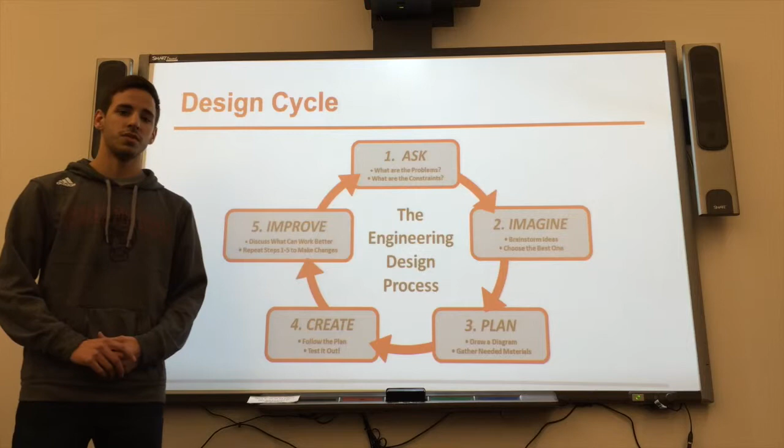During the design project, you need to remember the design cycle. Step 1 is ask, where we find out the problem. Step 2 is imagine, where we brainstorm solutions. Step 3 is plan, in which you design one of your solutions. Step 4 is create, where you build one of your designs. And step 5 is improve, which is where you improve on the design that

you built. So of course, we repeated the design cycle over and over again for the flaws in our design. But to start, here's what we came up with. First, we asked the big questions. What is the objective? Launch something precisely at a target. Then we discussed the parameters, restrictions, and requirements of our design.

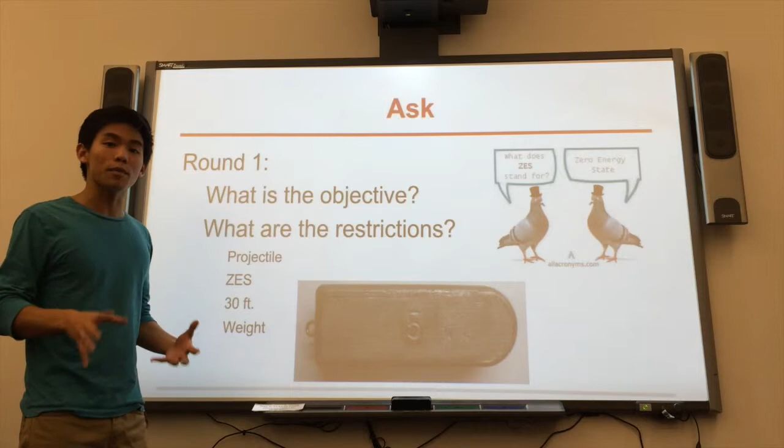The entire thing had to be able to fit in a 4-foot by 4-foot cube, and the projectile had to be safe to launch. The entire thing had to be in a zero energy state, and we had to launch the projectile 30 feet. It all had to be powered by the single drop of a 5-pound weight.

So for our research component, we first decided to look up some medieval siege weaponry, such as the ballista or the trebuchet. We decided that the design that best fit the requirements for the assignment was the spring-powered plunger and

barrel. This design involved 2 transfers of energy, the first one being the weight pulling back the spring to cause spring potential energy, and the second transfer of energy being the release of the tension that holds the spring in place, transferring that potential energy into kinetic energy.

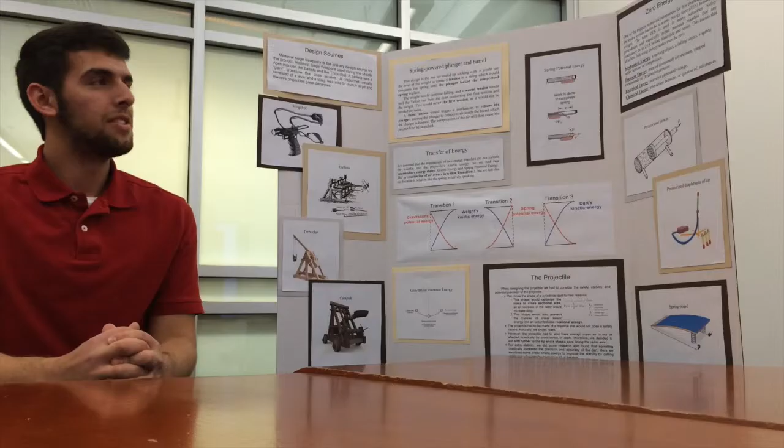The design had to start from a zero energy state. This means that there was no potential energy aside from the gravitational potential energy of the 5-pound weight.

For our projectile, we chose the Nerf dart for the following reasons. First, it satisfies the assignment's requirements that it be safe, and it is also the proper dimensions. Also, the shape of this dart is cylindrical, and it thus reduces drag, making it the most aerodynamic projectile.

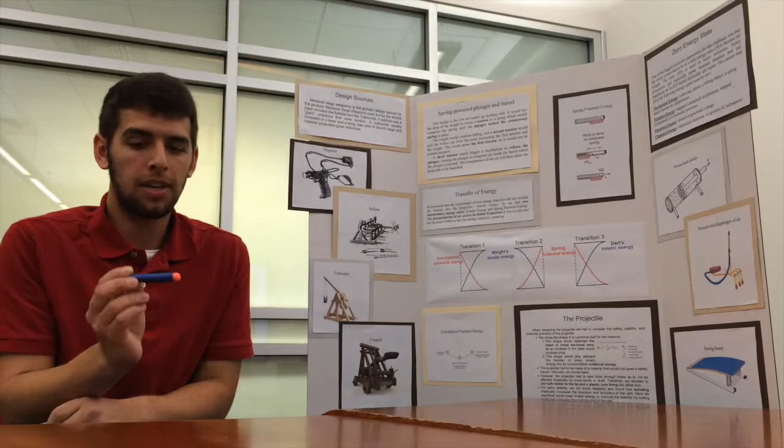On the spring-powered plunger design, we started drafting. We went through a couple of monstrous sketches, I have to admit, until we agreed on this general idea. Then we did more detailed sketches of the different components of the entire system. Here's a diagram of the cross-sectional supports of the plunger system.

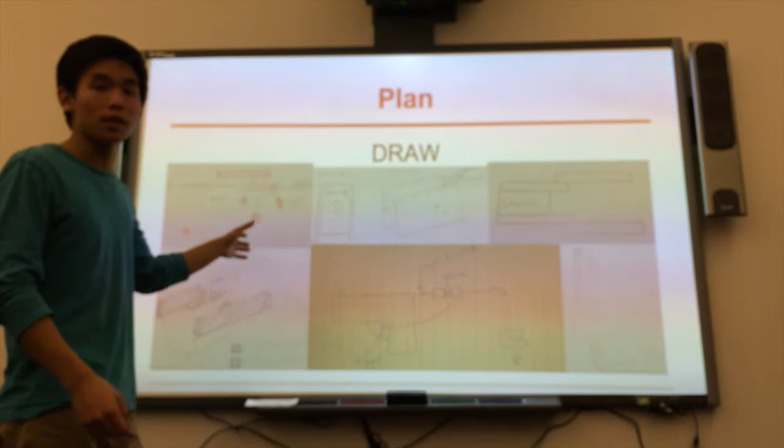Here is a profile and a side view of our chassis. Here is the mechanism for the vertical aiming component. And here's the base and reinforcing triangular supports. And here's a diagram of the pulley tower.

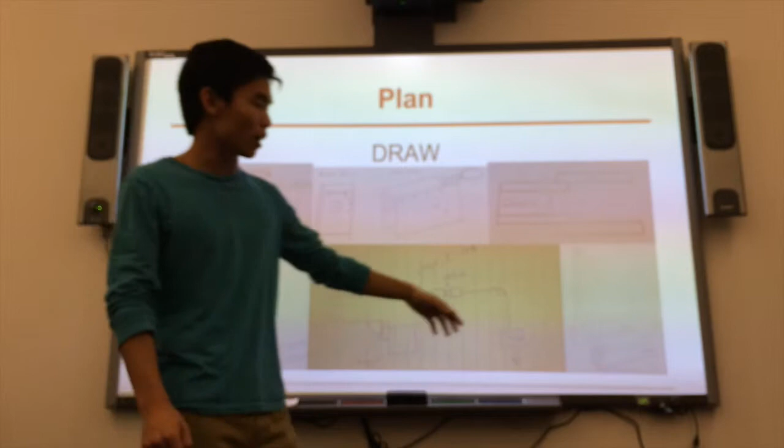Needless to say, all of our material was purchased well under the budget of $40, as most of the wood came directly from the discard bin. After fiddling with the pulley systems, we decided this version was the best and was the strongest and sturdiest construction. And of course, we tested it a lot.

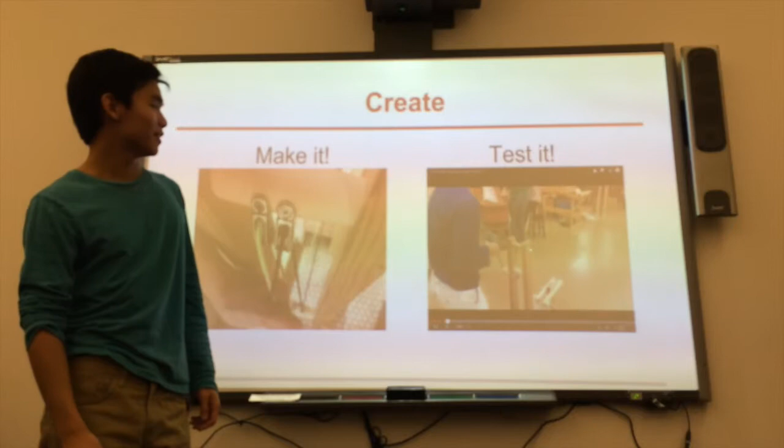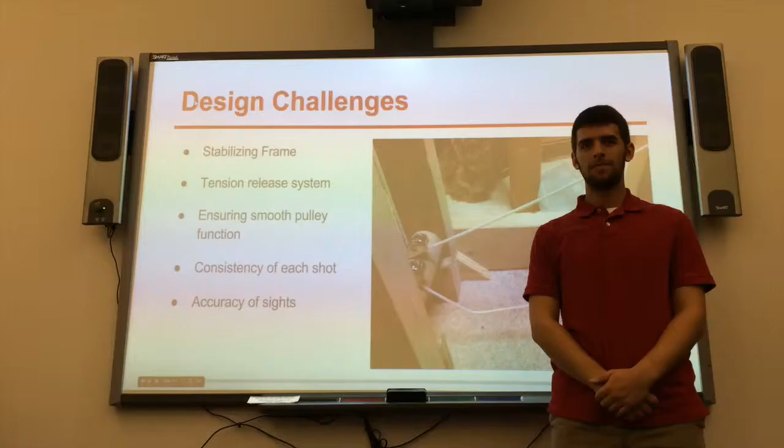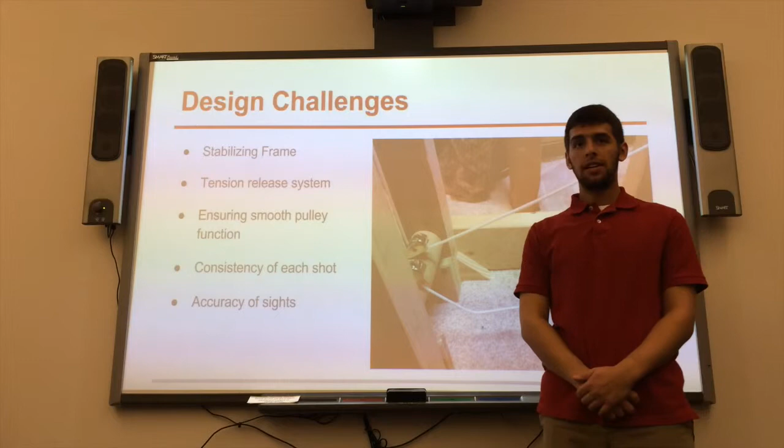There were many problems with our initial design. First, the frame wobbled every time we dropped the weight. The release system would not always release, causing the dart to be stuck in the gun. The string would often catch on the pulley. Each shot was not consistent, and the sights were not very accurate.

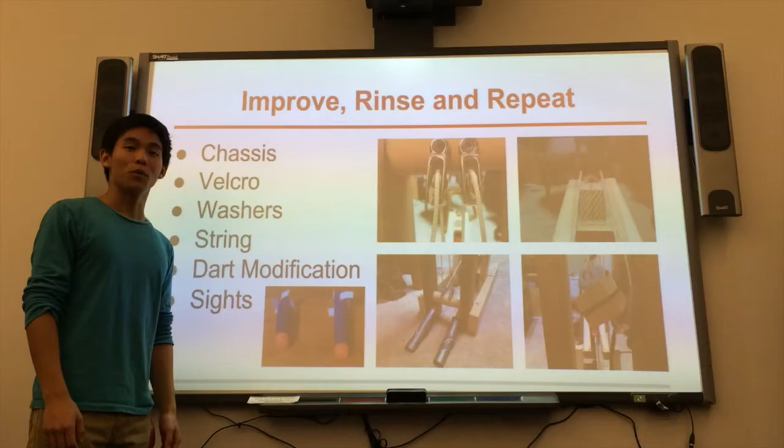We found problems along the way, but we managed to drastically improve the functionality of our launcher. To fix the stability problem, we added more and more triangular supports, because triangles are awesome. To combat the problem of energy transferring back into gravitational potential energy, we severed the tension through a brilliant system of Velcro. Props to Matt.

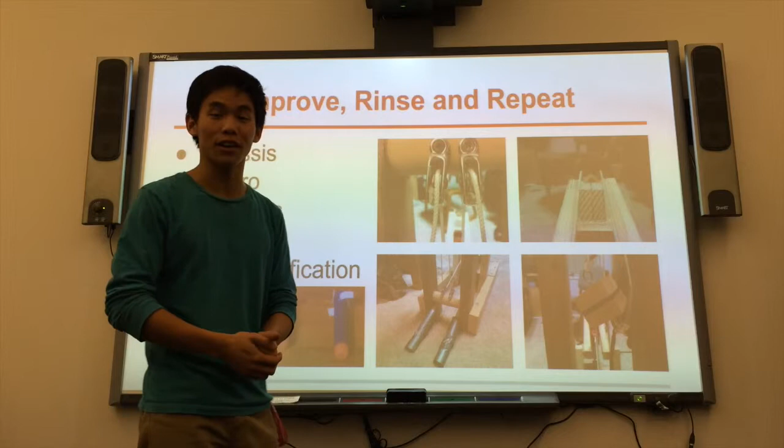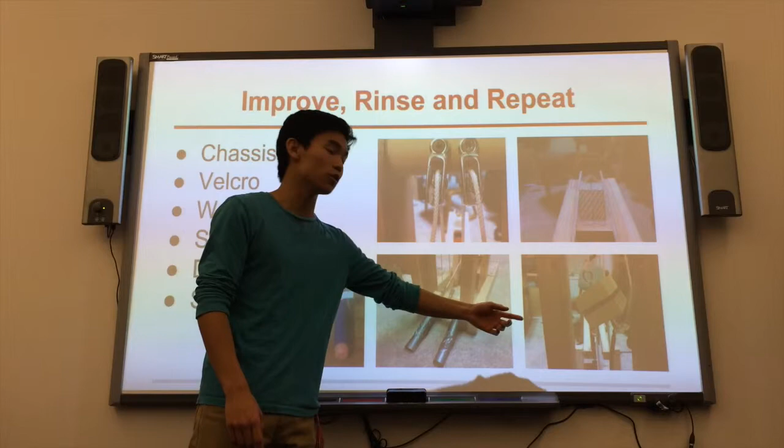To fix the pulley friction problem, we used moldable washers and inserted them inside the pulleys to prevent the string from catching on. To increase the stability of the projectile and thus the precision, we attached low-friction, self-fanning fins to our darts. And after calibrating the launcher to the correct vertical height, we aligned a pair of sights to the chassis to increase the horizontal accuracy.

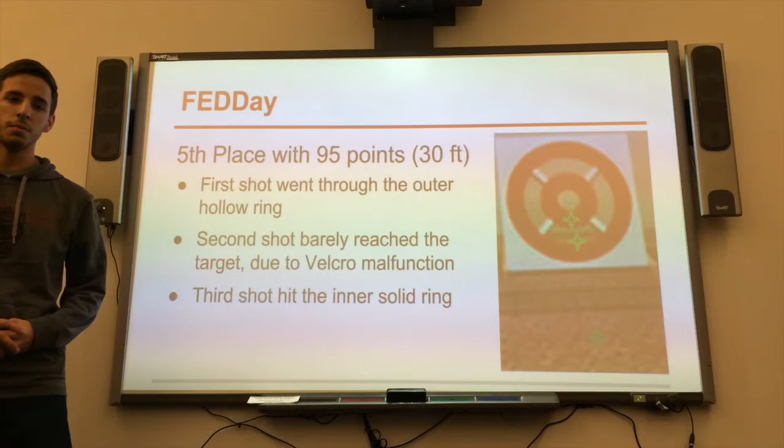FEDDay competition. We did fairly well with 5th place out of a total of 19 different teams. We scored 95 points for our 3 shots. The first shot went through the outer ring. The second shot didn't go quite as well as the Velcro malfunctioned, and it barely reached the target. And the third shot went through the inner solid ring.

Our project was pretty nice, but if we were to make changes, we would make a better, more consistent tension release system other than the current Velcro system we have. And we would also improve the weight system to avoid collision with the structure and make it less clunky.

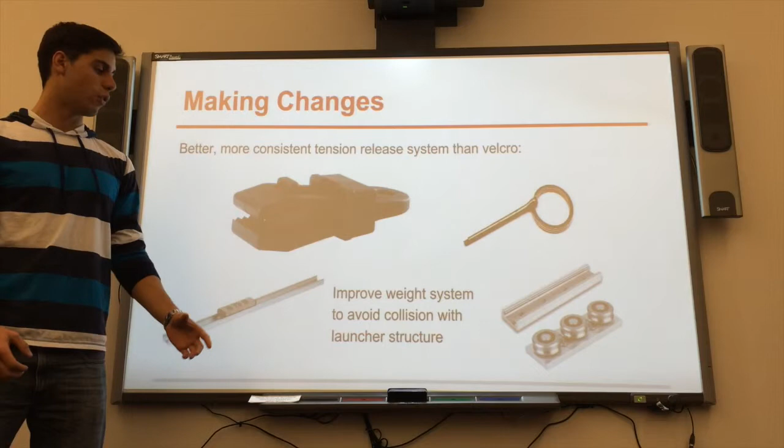As for advice we would give to next year's incoming freshmen, the biggest one would be don't procrastinate. It might seem appealing at first, but trust me, it will come and catch up to you. Also, start building and testing your project early. This will give you plenty of time to compensate for inevitable problems that will come along the way.

Also, test your design plenty of times and have a backup option. There's nothing worse than being on FEDD day and being screwed.